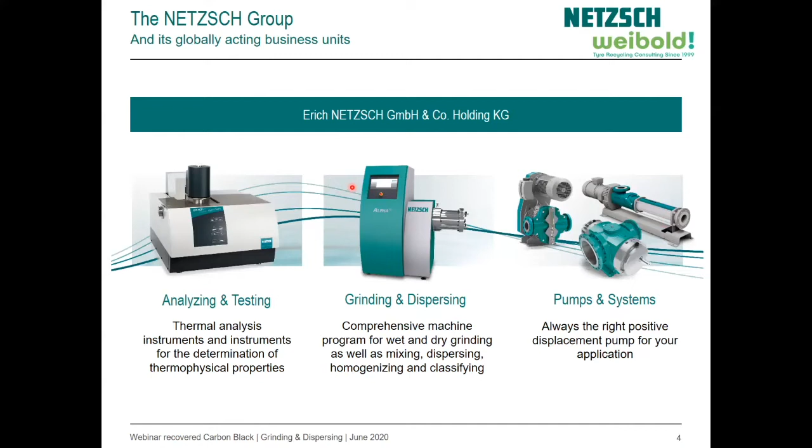And I am from a unit which is specialized in dry grinding and dry classification. So here you see the turnover in the last fiscal year: it's 500 million, and our employees is close to the 4,000 employee mark, and we are nicely growing over the last years. Like mentioned before, here are the business units, and you see grinding and dispersion is 1/3 of the turnover.

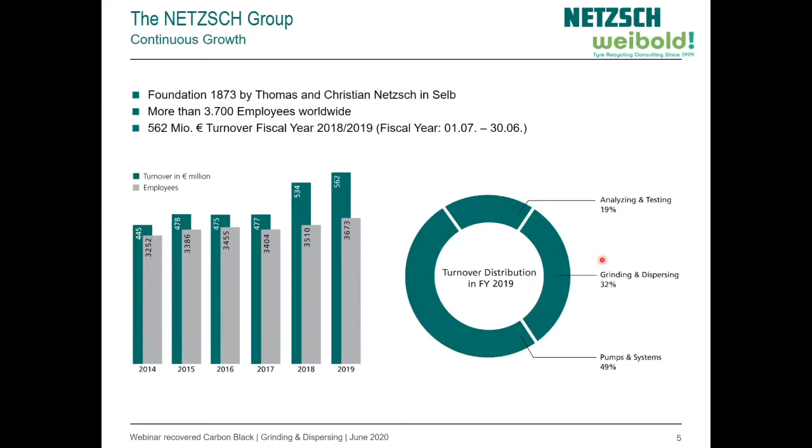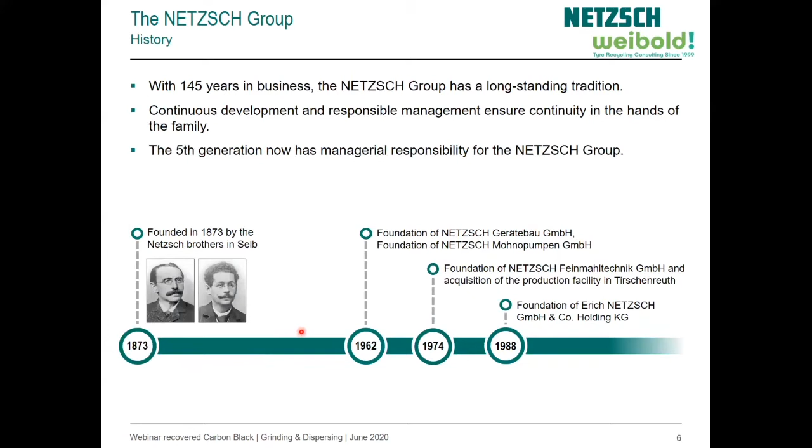We have roughly 150 years of history, and the company was founded by 2 brothers in Selb, and right now it's the 5th generation of the Netzsch family, with Paul and Moritz Netzsch on top of the holding. Together with Jens Nisser, they are leading the company and the business units on the current path.

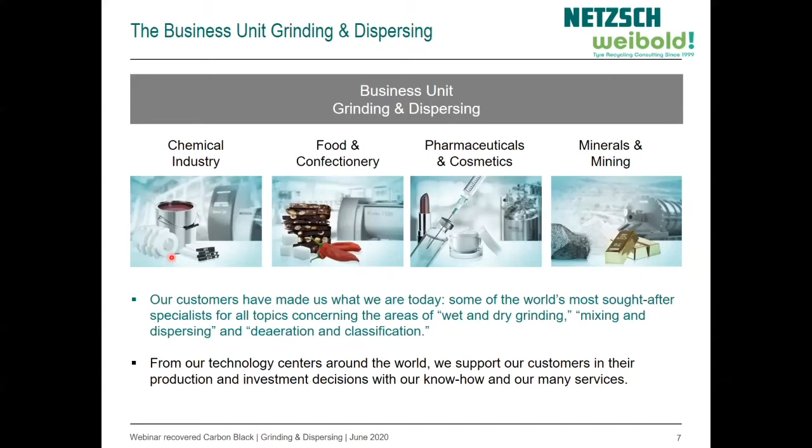The business unit grinding and dispersion is organized into 4 business units: the chemical industry, the food and confectionery, the pharmaceutical and cosmetics, and the mineral and mining unit. And for us, RCB, or recovered carbon black, is in the field of chemical industry, together with, for example, battery masses or liquids, paints and coatings, and things like that.

Our business unit has a sales volume of roughly 180 million, a bit more than 1,000 employees, and various production sites and laboratories worldwide, and also a lot of sales and service locations to always be on site if the customer needs any help or any after-sales service.

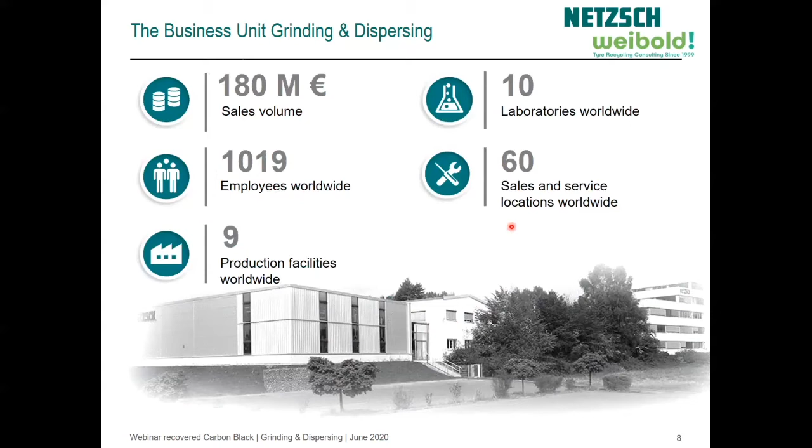So now to the core topic about efficient grinding of recovered carbon black. During the last webinars here at Weibold, I learned a lot about the pyrolysis steps, and this is, I would say, the state of the art - a very simple picture. We have the end-of-life tires going into the pyrolysis, and with the absence of oxygen and hot temperatures, we have the pyrolysis process, and you get 3 volume streams out of this pyrolysis.

The main and often focused product is the oil and gas, which is very valuable and can be sold on the market. On the other hand, you have a lot of steel wires, which can also be collected and sold on the market. And lastly, we have here the recovered carbon black.

If you have no further processing of this stream, it's more or less a waste stream, which is often sold as a secondary fuel in the cement industry, where you get maybe roughly 50 euros per ton. But here the big margin is if you have a fine grinding step - this is exactly where we come into the process, which is our challenge: to find the right technique to make a nice fine grinding step inside of this project and bring it to a certain fineness level where you have a much higher value than before. You can easily create maybe 500 euros per ton value, or even more. In some special applications, you can reach easily up to 1,000 euros per ton.

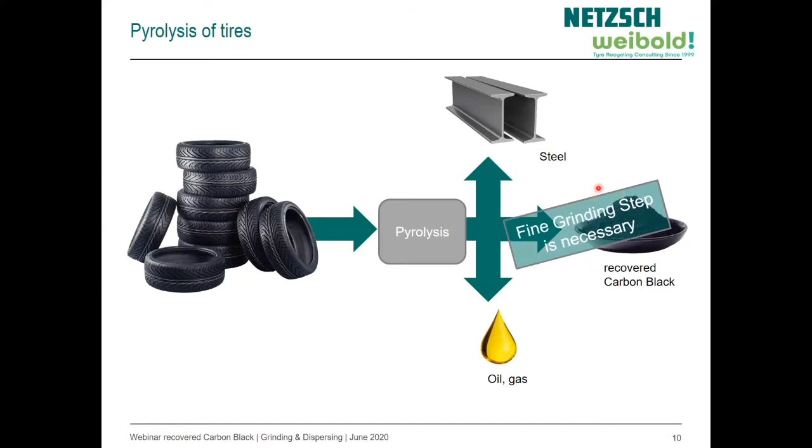So the first challenge is to choose the right machine. On this picture, you see all the machines we have in our portfolio over the working size - here's the particle size of the end product which is reachable. On the coarse end, we have a lot of cutting mills, for example for cellulose or fiber materials, which can be ground. Or we have the impact mill without any classification, just a pin mill, which works maybe down to 30 or 50 micron in a top cut for the end product.

And here on top, you see the classifier mill. It's a mechanical mill, but with a variable classifier. This can reach maybe down to 10 micron for the cut. This is the first machine which hits the targets for RCB on the market. I learned so far that we have 10, 20, and 30 microns, depending on the application, which are the main focused qualities on the market. And this machine could hit all the targets.

Even finer, we have our fluidized bed and high density bed jet mills, which can also operate much finer. The steam mill can reach maybe in the nano range, but we don't need it for the application, though it's still a good machine working in this range. Another machine here is a dry agitator bead mill - this works with a lot of friction in the grinding media, so this is maybe not the perfect machine for this application. And here we have 2 classifiers which cannot grind, just classify. So these 4 types of machines seem to be fitting for our RCB applications.

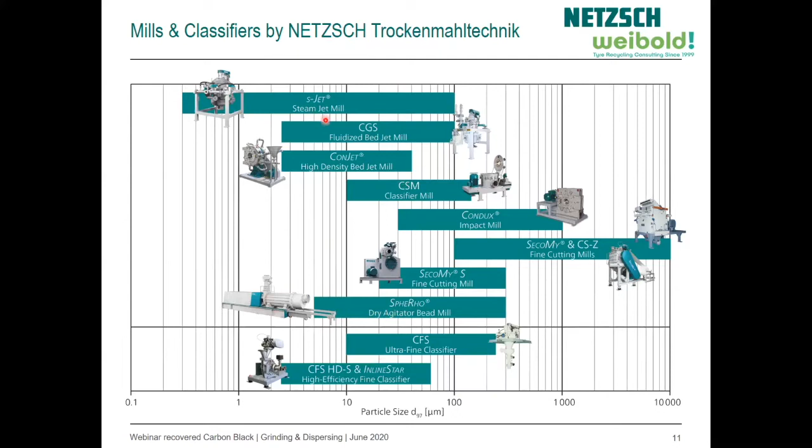For example, hard metal or alumina executions are also available to have good wear protection, but it's a mechanical mill, and you will suffer a lot of wear if you have crystalline products, for example silica. Normally for us it's a border if you have 0.5% silica in your product - we wouldn't recommend this machine, even if it's good in a good execution with hard metal or aluminum oxide to prevent the wear as good as possible. We wouldn't recommend such a mill for applications where you find a lot of abrasive products.

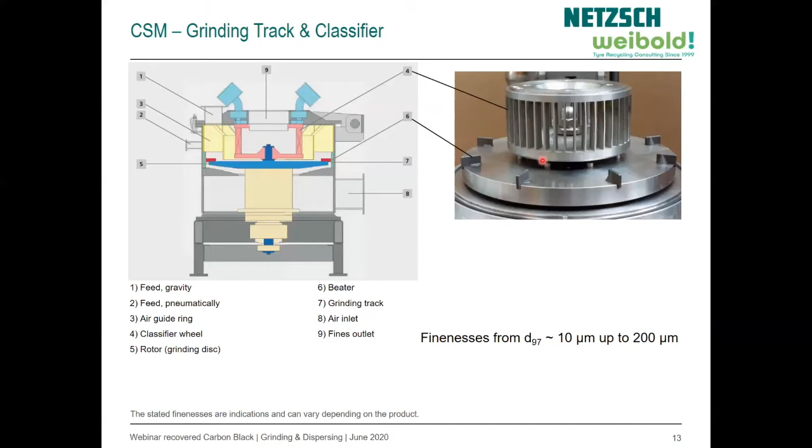On the next slide here, you see at least the advantages of such a machine. So we have a very nice oversized controlled particle collective after the grinding because we have a variable classifier on top. We have a long lifetime due to the bearings which are protected with purged air, and we have a nice possibility to access from the top.

You see here we have a double shaft system downwards here. So if you open the mill, the top of the mill, you can easily access the classifier wheel and inspect it, or even for maintenance, remove it easily. Then we have separate drives. Here this drive is for the grinding disc, and here the second drive is a bit hidden behind the machine. This will turn the classifier, so you have all variables to optimize the process easily to your application.

It's also possible to take this machine as a pressure shock resistant execution or a gas tight execution if necessary. But like I mentioned before, in terms of wear, you have to be careful if you have hard products or impurities in your mill. We wouldn't recommend such a machine, and for RCB this is the case. So often in virgin carbon black this machine is used, but for recovered carbon black we wouldn't recommend it due to the silica content and even the crystalline silica, which is still remaining in the tires from dirt from the streets, for example, will cause some wear problems inside of this machine.

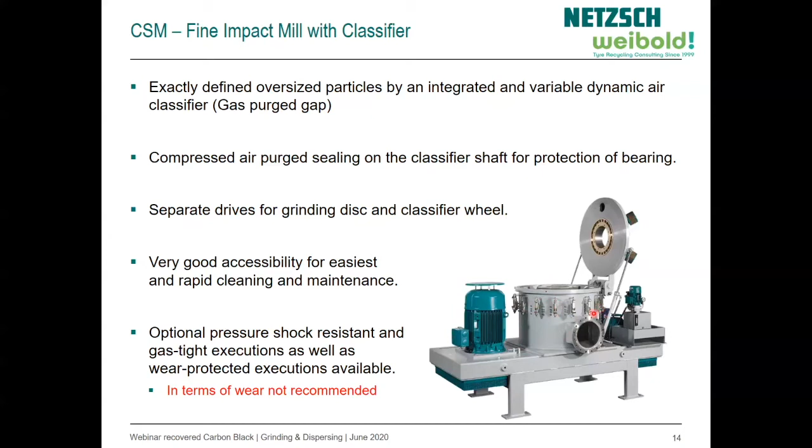The sizes can be various. All our machines are available in lab scale, like you see it here behind the stainless steel container. Here we have a blower inside, so it's a completely plant where you see the mill here. Then we have maybe a cyclone if necessary and a small filter unit. And here behind the machine you have a dosing device, so this can operate completely automatic in your lab scale

for feasibility tests, or just to produce some qualities to test the applications later on. Or you can go up to really big production scale, like you see it here, with very nice throughput ranges for big mass products.

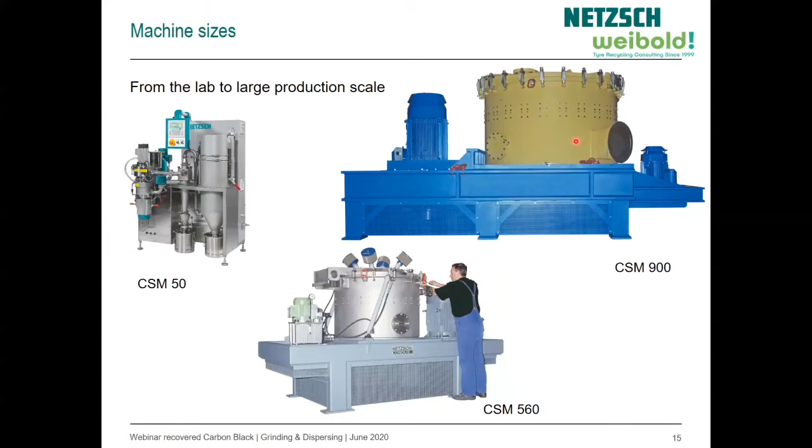So then the next step is jet milling. First of all, the definition - what is jet milling for me? Jet mill is process equipment with use of fluid under specific pressure and temperature. In our case, it's gas or steam, or the gas is normally air. This gas is expanded through jets, through nozzles, into a grinding chamber, and then the particles are accelerated by these jets and crushed by impact with each other. So it's autogenous grinding, and you have no wear due to the grinding process.

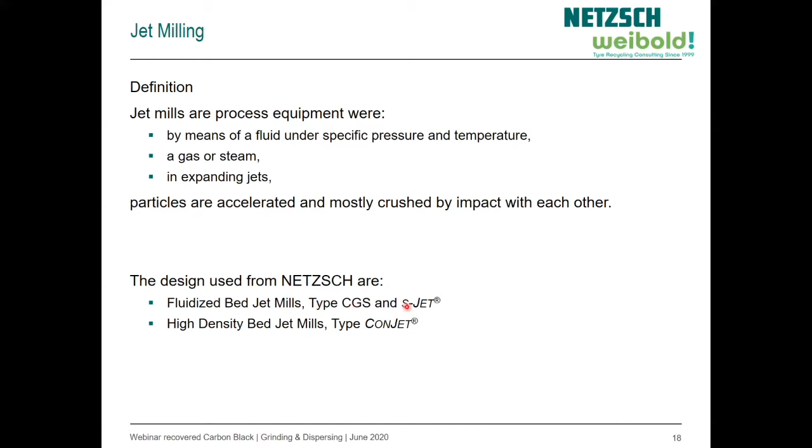We have two different types for this kind of bed mills: the fluidized bed jet mill, CGS or S-jet, or the high density bed jet mill from the type ConJet. Here you see the differences. On the right side here we have the high density bed mill ConJet, and in this blue ring we have the high pressure gas supply, which is expanding through this nozzle, and the particles which are falling through this pipe into the grinding chamber are taken into these nozzles, grinded, and are offered to the classifier wheel, which you see here in the middle, and the fine particles can leave the system and the coarse particles are rejected and fall back into the particle stream, which is in the vortex around the classifier wheel.

This execution is very nice if you have frequently changing products where you have to open the mill and clean it, because we have a very small grinding chamber and it's very quickly empty. If you want to stop, you just keep the mill running for several minutes without any feed, then it's nearly empty, and you have no losses of product.

Even if you have, for example, pharmaceuticals, which can also be a problem for health - if you open it, you have nearly no product remaining, and it's easy to clean and maintain. But this is more for specialties. For a mass product like RCB, where you try to run the machine the whole year with as few stops as possible, we would recommend the fluidized bed jet mill from the type CGS.

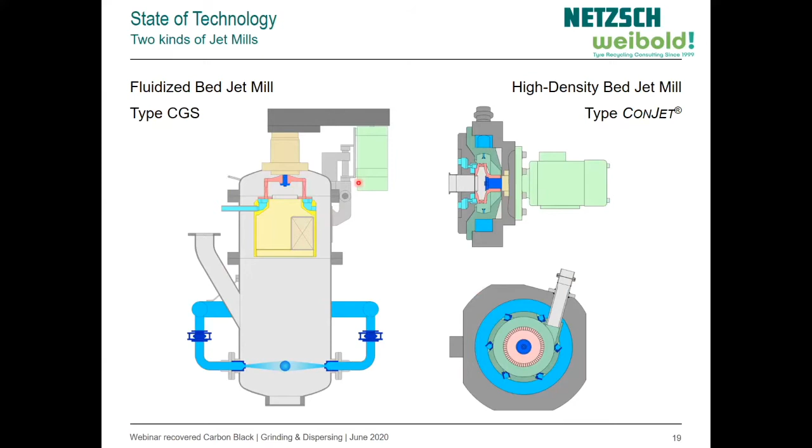Here you see the pressure supply, which expands in the grinding chamber, and the particles falling in this bed are ground, taken to the classifier, classified, and the coarse falls back while the fine leaves to the baghouse. But that will be explained in much more detail on the following slides.

First, the stress the particles will see inside the jet. The first stress is just on a single nozzle. We have the jet, and the particles enter over the surface of the nozzle and are accelerated. For example, you have a fast particle already in the stream, and another one falling into the stream, and this will be hit by the faster one from behind. There we have the first impact and the first stress on the particles.

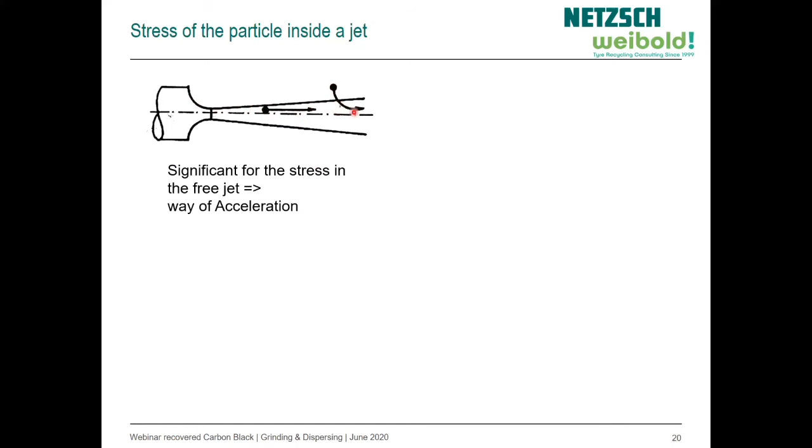On the other hand, we have the opposed system where the streams hit in the middle with a nicely adjusted distance between the nozzles, the center. The air easily goes in the other direction because there's nearly no mass in comparison to the particles, and the particles follow with their mass and acceleration, hitting each other at the focal point of the system, where the next stress and breakage occur.

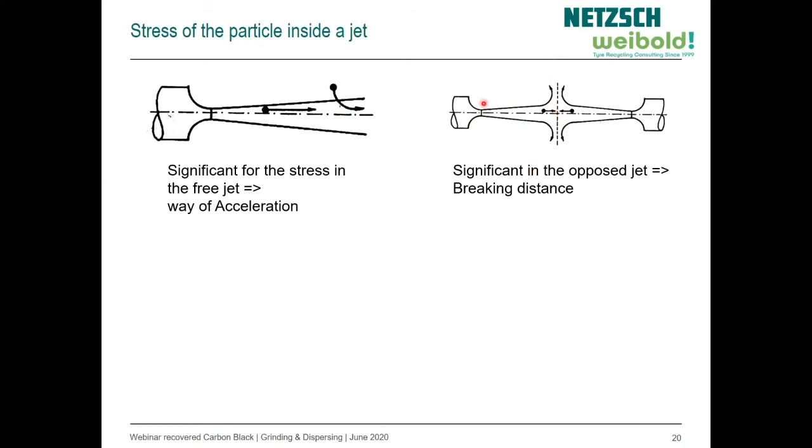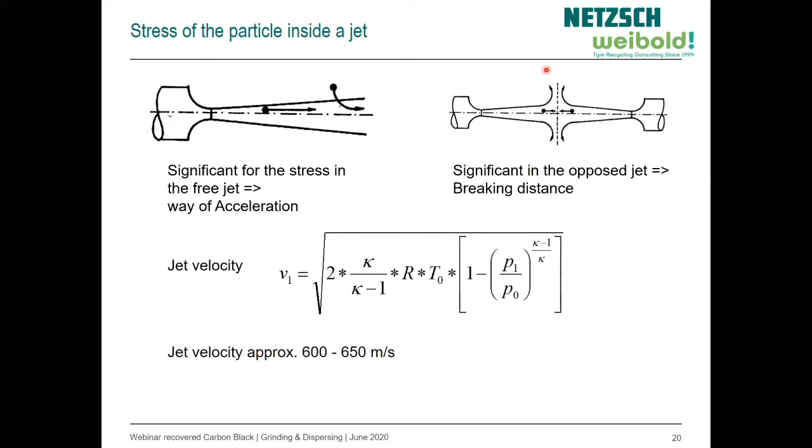The velocities here are very high, approximately 600 to 650 meters per second, easily reachable with these systems. So you see the potential of how fast the particles can shoot at each other and be ground.

Maybe 70% of the grinding takes place in the single nozzle, and only 30% occurs at the focus point where the particles hit each other. So the streams and the surfaces of the nozzles are also very, very important for our grinding.

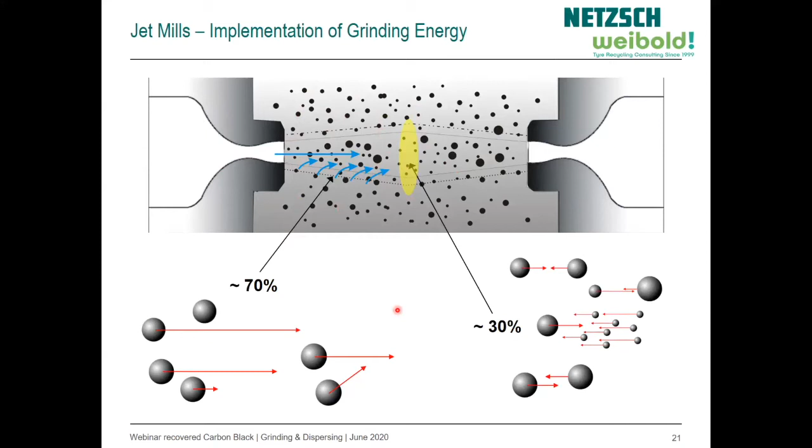But now some more words about how we operate such a mill. If I start it now, you will see the pressure and gas expand through the nozzles and leave to the classifier, and the product falls here into the fluidized bed level. When it reaches the nozzles, it will be ground and taken up to the classifier.

Maybe you see here the level of the fluidized bed is not constant yet. Of course, the fine particles will leave the system, so the level will drop, and we fill it with feed to keep a fairly constant level. The first challenge is to keep this level as constant as possible.

If we have a heavy product, we control it by the mass of the whole system. We control the mass, calculate how much fluidized bed level has to be inside, and keep it very constant with set points in our PLC. But for lightweight products, like RCB, if we have 100 grams per liter bulk density, it's not always possible to control the whole system with this mass control.

They need a different set point or value, and this is the amperage of the classifier. Here we have this belt drive classifier with the engine, and if the system is very occupied and full of product, the amperage of the classifier will be much higher than before. So we can use this as a set point.

For this, our first advantage is, of course, a single classifier design. You see we have only one classifier in the machine, and only one engine to control. This gives us a very accurate set point.

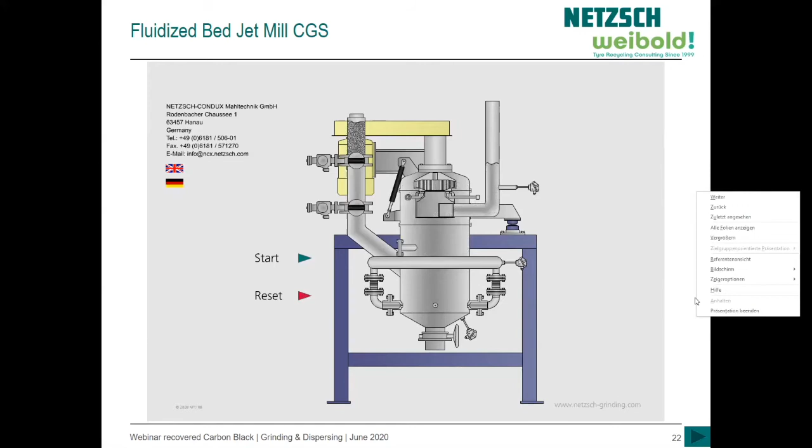And I want to continue with the new systems, S-JET and E-JET. So the question was, maybe 30 years ago, is the standard operation mode of a jet mill very accurate and the best you can reach? We always have high pressures, normally 6 to 9 bars maybe. You have quite moderate temperatures, and the discussion with customers and the industry showed that's not the best way.

You're always forced to go with efficiency. You have to reduce your carbon dioxide. You have to reduce your efficiency in terms of money. You just save money if you save energy. So we need a new system for optimized energy usage.

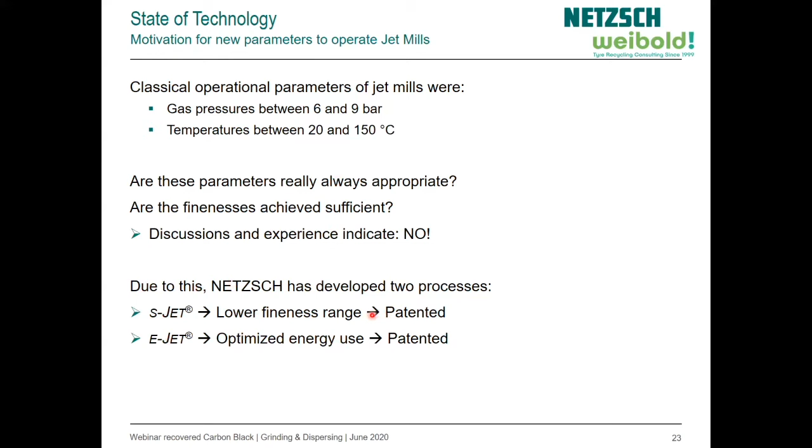And the answer from Netzsch was the E-JET system, and to be even in the lower fineness range, or even more effective, we have the S-JET system, which is for steam application. I want to explain those systems over the next minutes.

So the E-JET system - first, to understand why we optimize the compressor, you have to look at the whole system. Here we have our mill with the 4 main electric drives, I would say. We have the baghouse blower at the end, which creates under pressure in the filter to suck the product from the mill into the filter. On the other hand, we have the feeding device, which brings the product into the mill. And here we have the classifier engine, like mentioned before, which turns the classifier.

So these components are not so big in comparison to the compressor. The compressor is a very, very big energy consumer, and you have to focus on this one if you want to save energy. So normally positive displacement machines are used.

For example, here's one sketch from Atlas Copco, and the screws turn into each other, and the gas is compressed, and you have a dramatic temperature increase over such a screw. Here at the end, for example, you have 3 bar and 200 degrees Celsius. If you want to reach the conditions mentioned before, 7 or 8 bar, you need a second stage. The second stage cannot handle the high inlet temperature of maybe 200 degrees, so you have to use the intercooler to bring it down to ambient conditions, and then you can go with your high pressure again into the second stage and create the conditions required for your application.

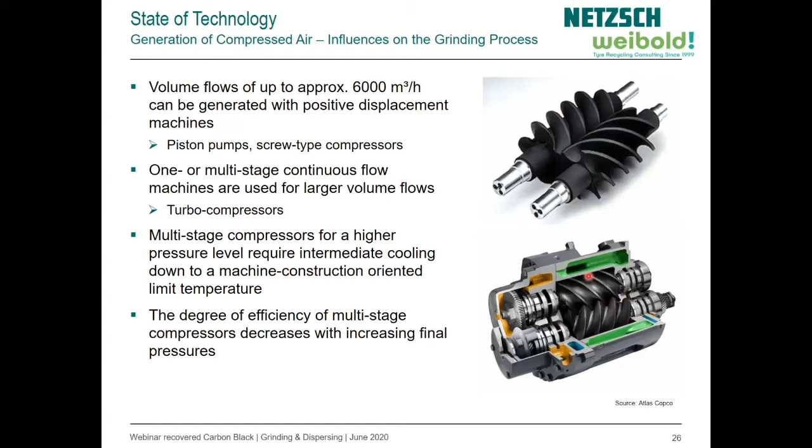And these two cooling steps, the aftercooler and the intercooler, are a massive loss of energy. This energy should be used in the process, otherwise it's a waste.

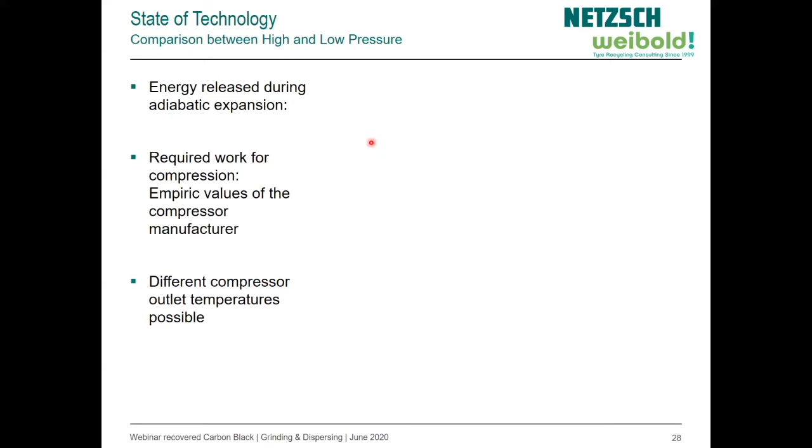This becomes clear if you see what energies we have on site during our grinding steps. So first, the energy which is available for grinding - this is the kinetic energy of the gas behind the nozzle. So you can calculate how much energy you use after the expansion.

And on the other hand, we have the work to create this kinetic energy, and this is the value from the compressor manufacturer, because this is hard to calculate. We have a lot of mechanical efficiency in this machine, so we cannot calculate it with thermodynamics laws like this. So we have to use the empiric values from the compressor manufacturer, but they have a very big database, so it's also very accurate.

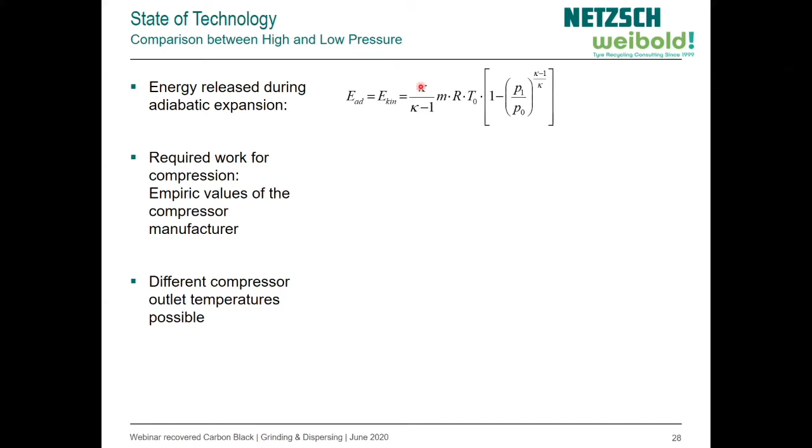And with these two values, the energy which you are putting into the process and the energy which can be used in the process, we define our efficiency. And here you see the single stage machines. If you use a high temperature, you can create maybe 70% efficiency, which is quite good.

And here in the second chart, they are two-stage machines from 2 suppliers, and the first one is using 160 degrees at the end, and the second one is using 200 degrees. So maybe if I go one slide back, they just spare the aftercooler.

So you need this intercooler because the second stage cannot handle this high temperature which is coming from the first stage, but this aftercooler can be thrown out of this project. So you just have the intercooler. So this is why we have this dramatic loss of energy.

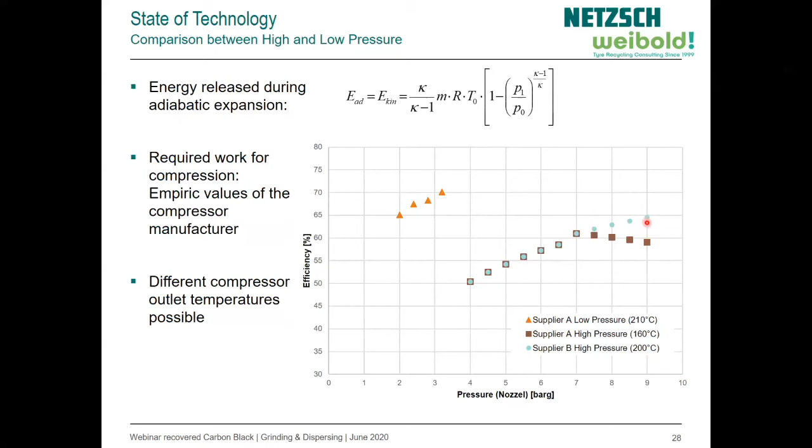But at least if you take all the energy from the second stage into the process, you have a higher efficiency. And you see supplier A is not able to take all the energy from the first step into the second, or not as much energy into the next step as supplier B. Supplier B can end up here with 200 degrees instead of 160, and you see directly the change of the efficiency.

So we try to take a single stage machine, go as high as possible with the pressure, and take as much temperature as possible into the process to have a much higher process volume than you would have at lower temperature.

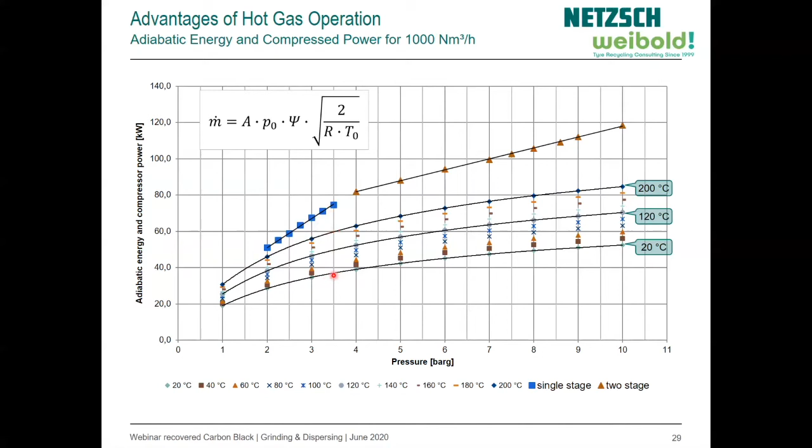So I want to summarize the e-Jet concept. We have one classifier wheel in our machines. This is a factor for constant product quality and reproducible fine cuts. It's easy to maintain, and it's steady and low wear. We have high efficiency due to the flow optimized machine design, and we have patented nozzle distances for hot gas operation to have an efficient setup. And we have a temperature stable bearing for high availability.

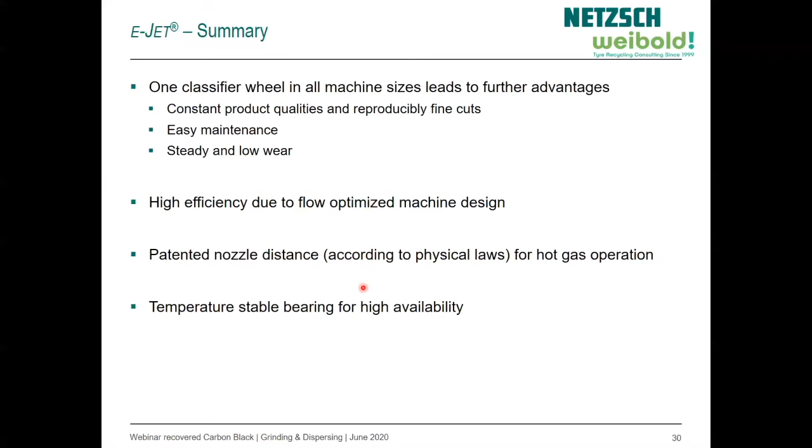We just create very nice heat inside. Then we have maybe thermal oil to take the heat away. Then we create steam, and the steam goes over a turbine, and the turbine turns a generator, and then we have electricity which can be transformed into the net. Then, simply put, on site of your plant, you can plug in your compressor and create your e-Jet system.

But already here, after the transformation of energy, we have maybe 36% efficiency. So this has a loss of roughly 60 to 70%, and this is a malus. This is a carbon dioxide backpack which we already have when we plug in our machine.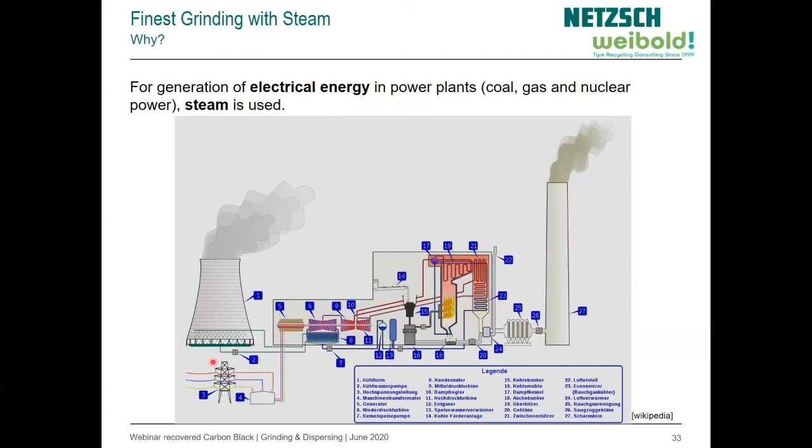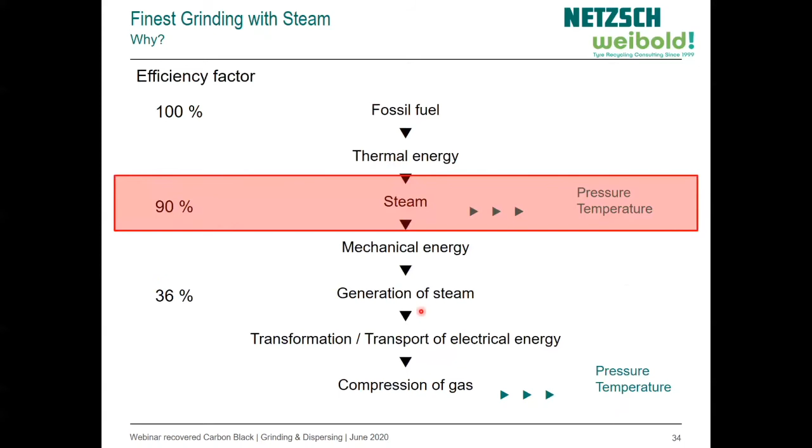So why shouldn't we stop here at this stage? Where we have 90%, where we burn our fossil fuel, have thermal energy, we are creating steam, so we have a gas with high pressure and high temperature. This is exactly what we normally reach with our s-Jet system. So we can stop here with an efficiency of 90%, which is much higher than everything we can reach down here, because we have the mechanical steps of our power plant in between.

Our standard conditions which we are using for the s-Jet system are normally 40 bar, but if you go higher, you are even more effective. For example, in the US, we have plants which are operating with 100 bar pressure. It's also possible. And we expand the gas over our nozzles, and then with the internal pressure of the mill, we end up at 1.1 bar pressure and maybe 300 degrees.

So you see we are again much above the phase boundary. We are still in the saturated area -- in the overheated, not in the saturated, in the overheated steam area. So our particles never see any moisture. They are kept very dry all the time.

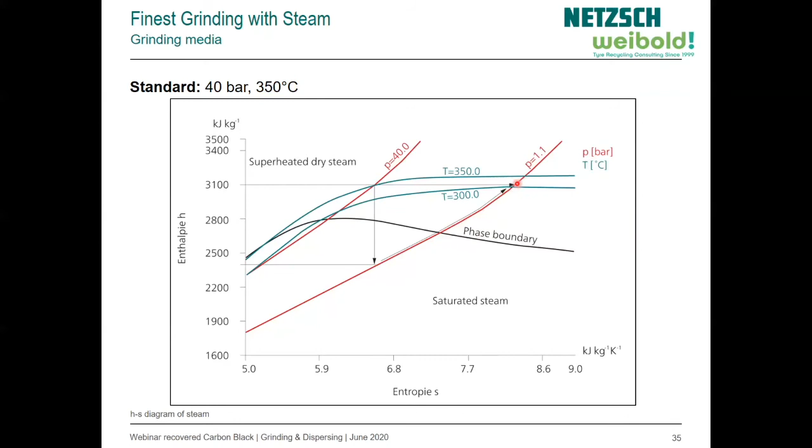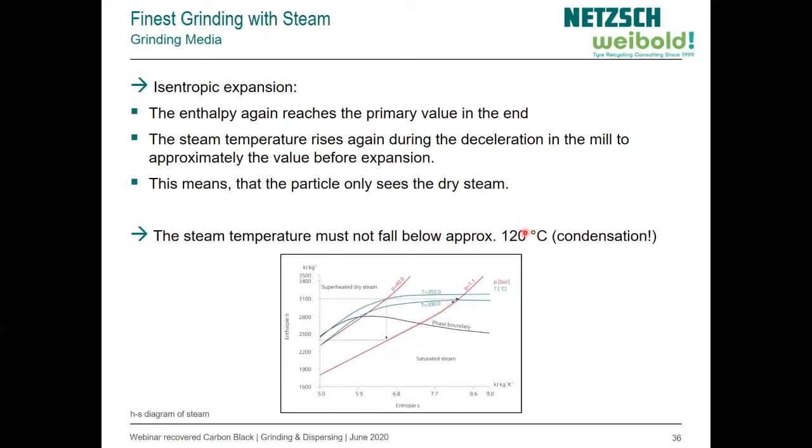So this is an isentropic expansion, and the enthalpy, as you see here, is nearly the same. Only the entropy, which is used for the grinding, is changed. And even at the back of our filter, we have 120 degrees minimum, normally a bit more, to be sure that we never have any condensation inside our process.

Here's an image of steam and product temperature improvement. So we have here our whole steps over the mill, and here we have the temperature in red from the product and in blue from the steam. At the beginning, where the steam goes to the piping coming from the boiler, we have 350 degrees for the steam and maybe ambient temperature for the product.

And up at the nozzles, we have some losses over the piping, and the temperature of the product is still the same because it's in contact with the steam. And then we're expanding the steam through the nozzles. There we lose, due to the expansion, a lot of temperature. And here we have the first point where they have contact with the product.

So we have heat transfer at the later points, and we are mixing the product with the steam, and it's grinding and it's dispersed, and the temperature of the product is rising while the temperature of the steam is coming down. And here at the filter, both components, product and steam, are separated, and the steam goes, as mentioned before, at 120-130 degrees over the blower into the environment, while our product can cool down back to ambient conditions.

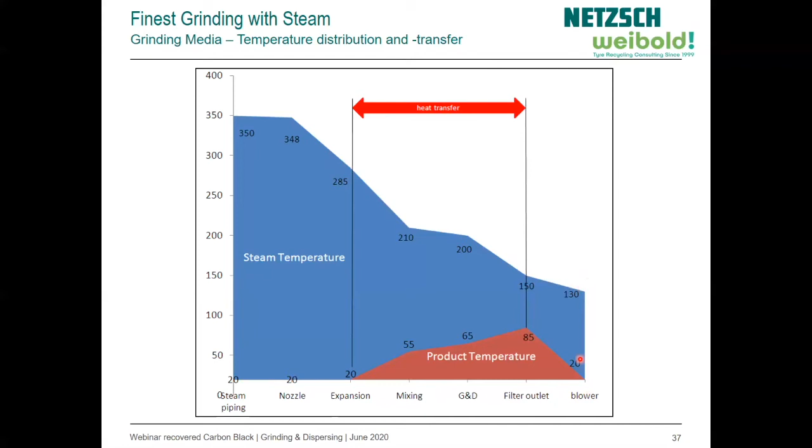So a very important point is the steam supply. We take the steam, if necessary or if available, from the steam network. That would be the perfect conditions if you're maybe on a big industrial area, or if you are operator of a petrochemical industry plant, then you often have a steam network on site. This would be the perfect solution.

Another very good solution would be if you have an existing saturated steam network, then you can install a local superheater to get the steam into the conditions that you really need. Or the last possibility is also possible: you have a separate boiler which is directly linked to the plant. This is, for example, what we are doing in our test lab.

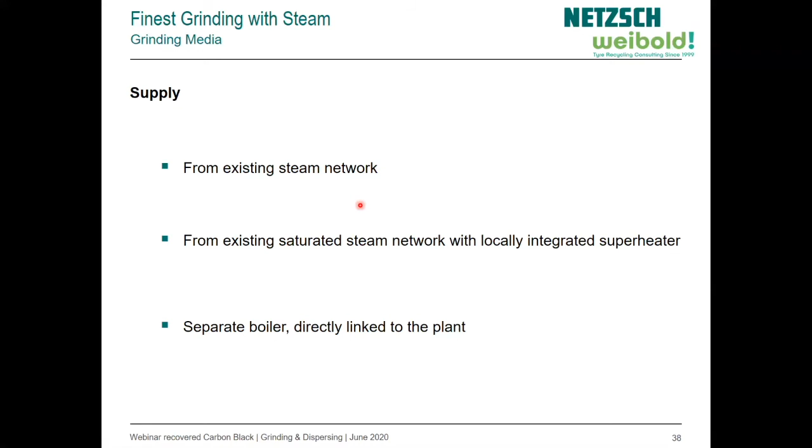They need some components I will explain later on. And of course, you need a fuel. Electrical is normally only used for test lab plants, because then you don't have the efficiency bonus like I mentioned before. But oil and gas in general is taken. And that's also very interesting. We can maybe discuss it later on.

Even in the RCB process, in the pyrolysis, you have a lot of gas which is maybe not possible for sale. And I know that some of the plant operators burn it in a gas engine to create electricity for their steps, or even to sell the electricity. This is also a nice option. Maybe you can switch this and use the gas directly as a fuel to your milling step.

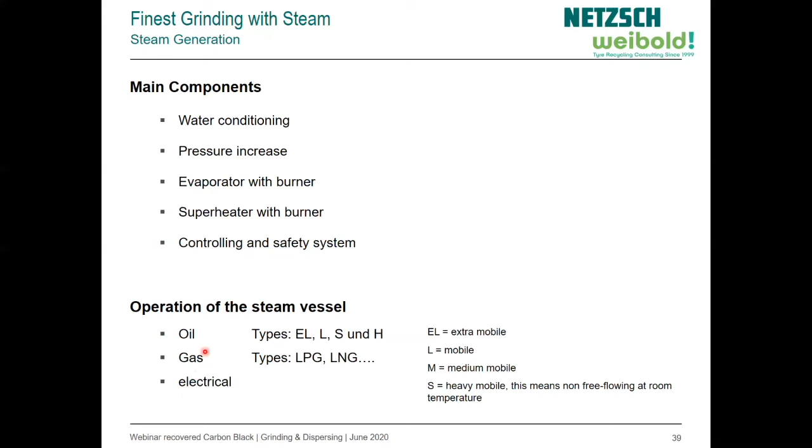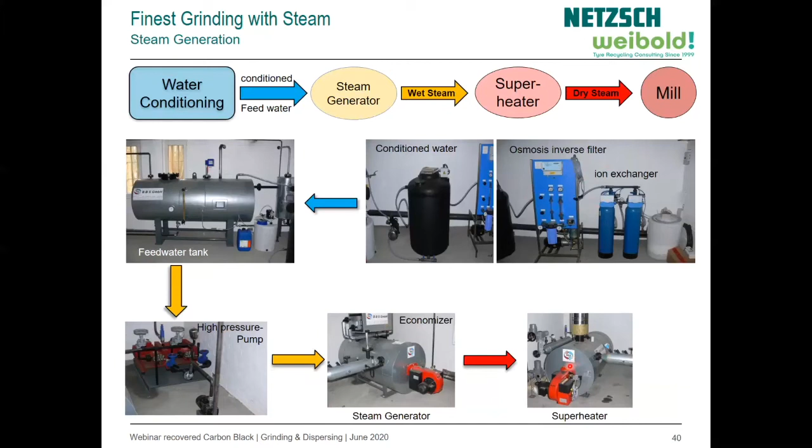But now the steps in our test lab: we have a very nice water condition unit, feed water tank, high pressure pump, then the steam generator with the economizer for the steam coming back from the superheater, and the superheater which delivers these conditions to the mill.

And this was a very wide installation because it was our first one, and we had plenty of space, so we made it easy to maintain and easy to change something.

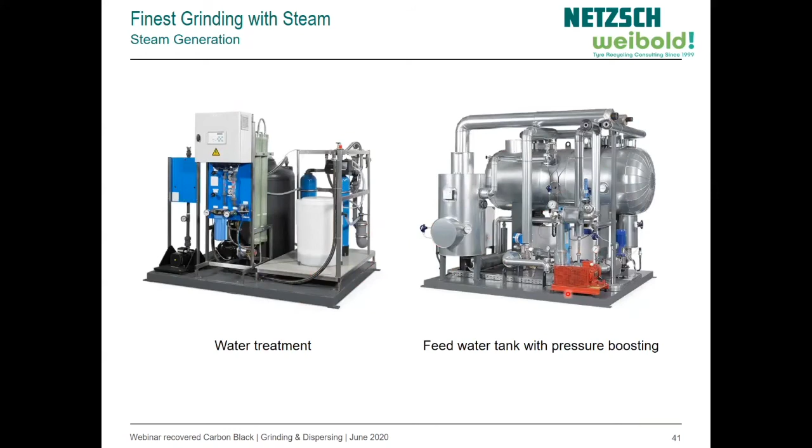Right now, for an industrial plant, we have it much more compact, like this installation on a skid. You can use it in a container, and it's easy to operate and easy to commission on site of the plant. So we have a water treatment and the feed water tank with all the pressure boosting, like the high pressure pump here, and then the steam boiler and superheater as a second unit. And yeah, it's very nicely compact already.

So the summary of the s-Jet system is nearly the same as the EJet, because everything like the single classifier wheel and the autogenous grinding stays the same. Additionally, we have much higher pressures and much higher velocities, so we have much more energy in the system.

So we have double the jet velocity. We can reach much higher values than 1,000 meters per second. And this leads to the fact that the capacity of a mill with the same size can be much higher than the capacity of a normal jet mill operated by air.

Then the efficiency, on basis of primary energy, is much lower in energy consumption, so the efficiency is higher, and this leads to a much better CO2 emission over your process. And existing steam networks can be used, or better, should be used, because if you already have steam on site, this is a perfect solution for your application.

Now a short comparison of steam and air. Maybe just the technique at the beginning: here we have the mechanical compressor and the thermal steam generator.

And I think the most important point is that the generated heat in both systems can be used. Here we should use it for the EJET system, and here it can be completely used, because the burner or all the waste heat is also useful to increase the temperature of our fluid from the inlet side.

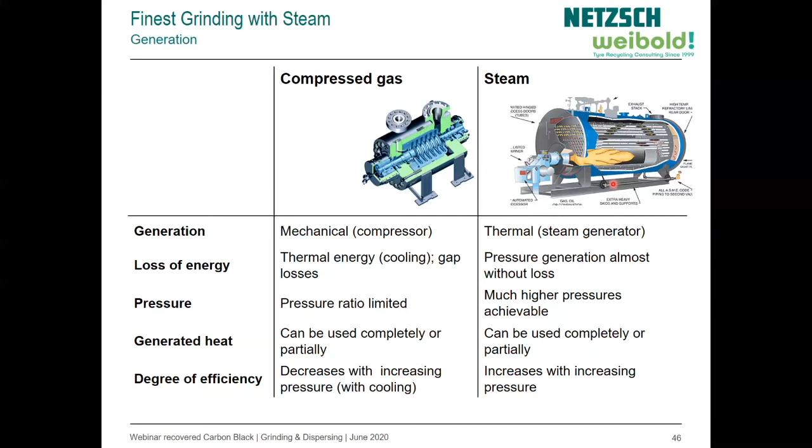Okay, but this is more of an academic point of view and always about energy, but that's normally not the important point for industrial applications. We always go after the money, and this efficiency can also be directly transferred into money.

But here first you see the efficiency for primary energy, and even if your electric drives on the plant for the EJET system are nearly perfect, you at least have the same efficiencies in the power plant as the electricity you get. And here the 90% can be directly influenced by your process, by your steam generator.

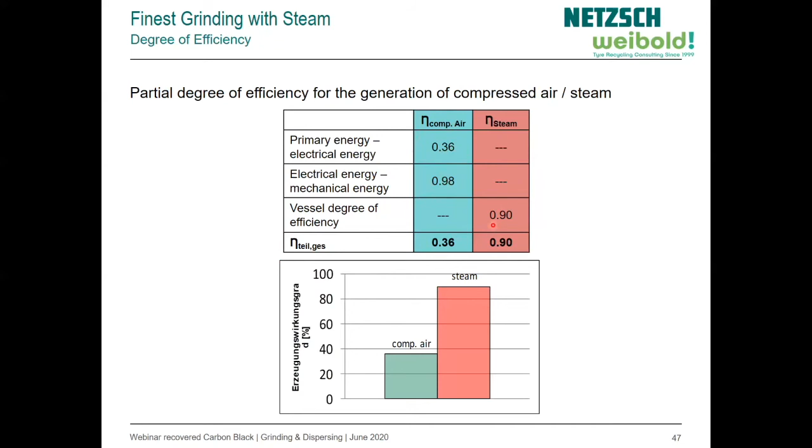But now the promised chart for the cost comparison. I take a fictive number for a 3-ton RCB plant, which can be operated with one air mill. We have a feed size of 2 millimeters, for example, and the product size should be everything below 10 micron. I took the same identical specific energy for both systems, for the EJET system and for the s-Jet system, and I discussed with a German customer what the prices for the supplies are for energy, for electric energy.

He told me that's 0.1 euros, so 10 cents per kilowatt hour. The operation would be E-jet system with 3.2 bar and 220 degrees Celsius. So the operation cost just for the grinding step, without any before and after steps, just for the grinding, would be 22 euros per ton of RCB.

And for the s-Jet system, the same customer told me that you have an internal cost factor of 20 euros per ton steam. And then you can operate at our standard conditions close to 40 bar gauge and 320 degrees Celsius, and the operation cost would be 15 euros per ton.

One very interesting point is, like mentioned before, this cost should be directly checked by yourself. So if the steam is maybe much cheaper because we have some liquid oil or even some gases which can be burned on site, maybe your cost will be dramatically lower.

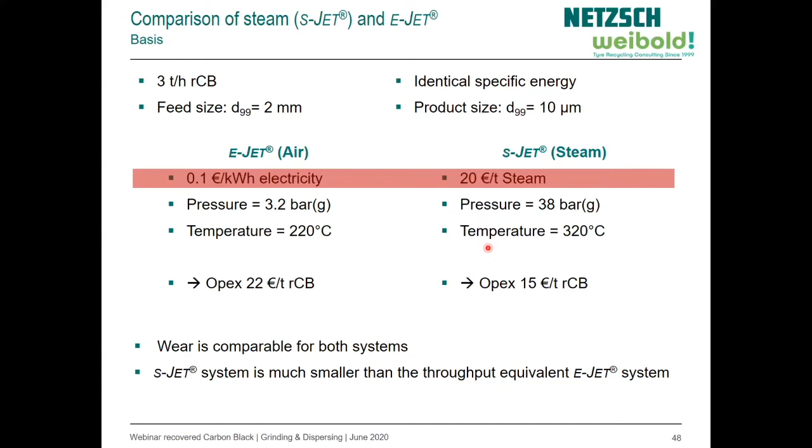So now I come to some examples and references, two to be correct. The first one, I would say, is a medium sized machine. It's a CGS71 with 2,000 cubic meters gas volume.

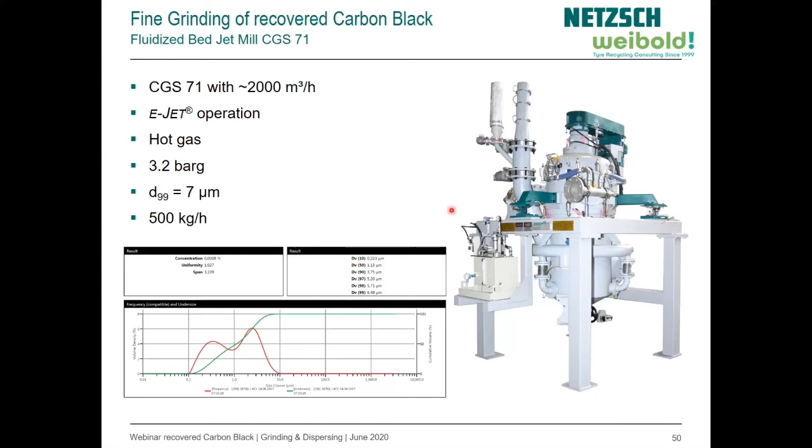This is an E-jet operation for hot gas at 3.2 bar gauge. The target of the customer is 7 micron, and the throughput which was guaranteed, which in reality is a bit higher, was 500 kg per hour. You see here our measurement, done with a Malvern Master Sizer 3000 in dry operation mode, and you see the D99 with 6.5 micron is perfectly hitting the target. So this is a nice machine in operation.

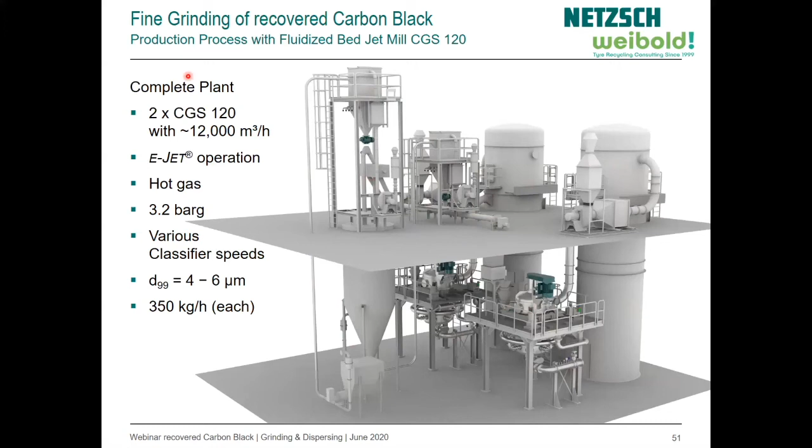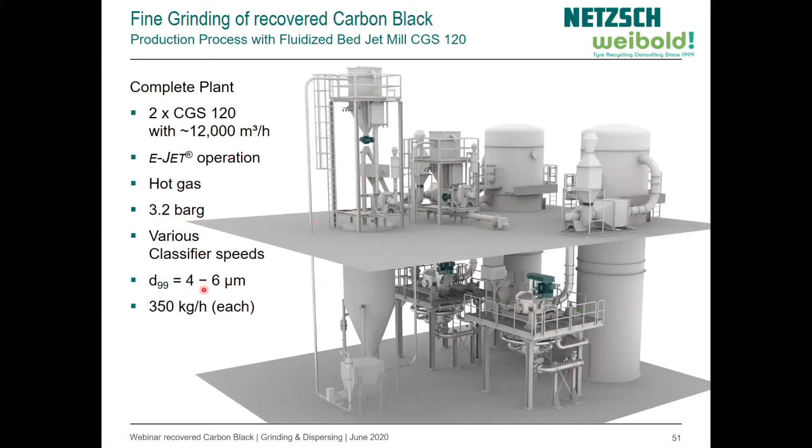These machines are bigger, with 12,000 cubic meters per hour. It's also operated in E-jet operation with hot gas at 3.2 bar gauge. Various classifier speeds are requested, and for the finest point, for the 4 micron, maybe you see it here on the next slide.

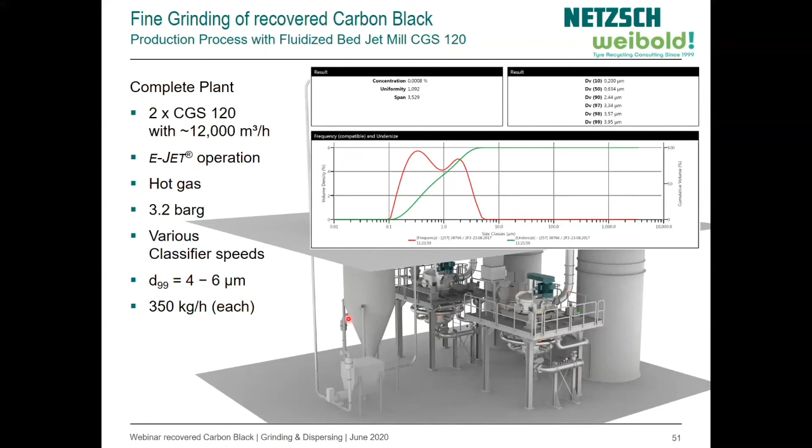Okay, another important point we learned in our test lab, also very interesting to mention, is that the quality influences specific grinding energy dramatically. We have here two different qualities of RCB, which I call RCB A and RCB B. In terms of quality, for example, the pyrolysis process is different: is it a batch or a continuous process, is it 2-step or 1-step, is it with microwave, with electricity, with gas, or whatever. So everything beforehand influences strongly the quality and also the composition.

This was, I would say, good grindability for the product. So if you reach, for example, 6 micron in the D97, you need roughly 300 kilowatt hours per ton of energy for RCB A, and for the same quality, the same fineness, RCB B needs roughly 1,000 kilowatt hours per ton.

So you have the capacity factor of 3 or even more between these 2 qualities, just due to the differences in your process before. So it's very interesting for us to know as much as possible about your RCB, and it's also interesting for you if you want to make trials to determine how big your grinding step should be to get the real quality you later have in the process. Otherwise, there could be a big difference between the checked and the calculated values.

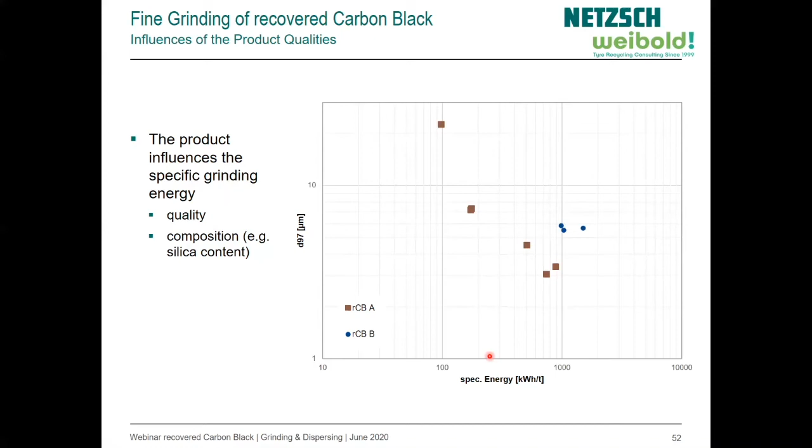So the last slide, just a short summary for all the points I mentioned before. The fineness of recovered carbon black is important for later applications. In my point of view, you should definitely go with a fluidized bed jet mill. It's a proven technology, very wear resistant, and even if it has a higher investment than comparable mechanical mills, it will be a very nice machine later on, very stable and with low maintenance cost.

Then the 2 systems I introduced to you: the E-jet system, a kind of standard machine with a compressor. We already have several systems on the market running, producing, as mentioned, very good quality RCB with electricity. On the other hand, we have the s-Jet system. This isn't often used right now on the RCB market, but it seems to be very promising. And there we should also do some tests or proofs if you have steam available on your plant.

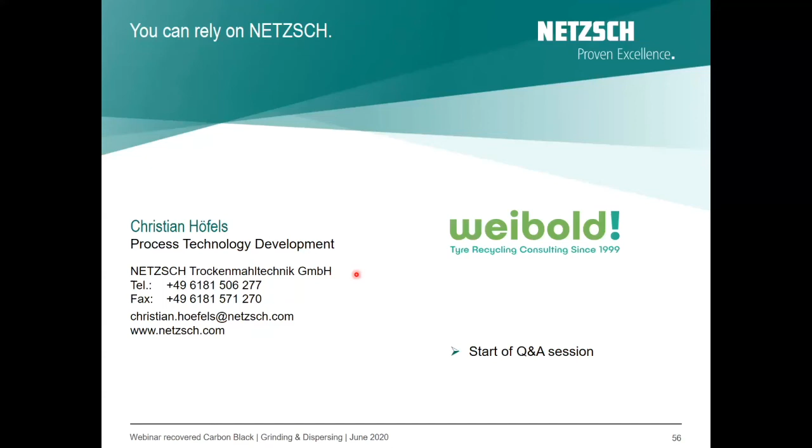Yeah, of course there are some costs because we do the test for you, and you are invited to join the tests. Our test lab machine is a CGS 50, so it's roughly in this range, and normally I would say we need half a day for one setup. So if you just specify your target, for example D97 or D99 of 10 micron, then we can produce something in this range, around 300 kg per hour.

And if you want a very stable run, you need 1 ton of product for such a single point, and then we can make the accurate scale up and say exactly which size for which throughput you would need with your specific RCB.

Thank you, Christian. Next question: what are the pros and cons of using air versus steam as gas?

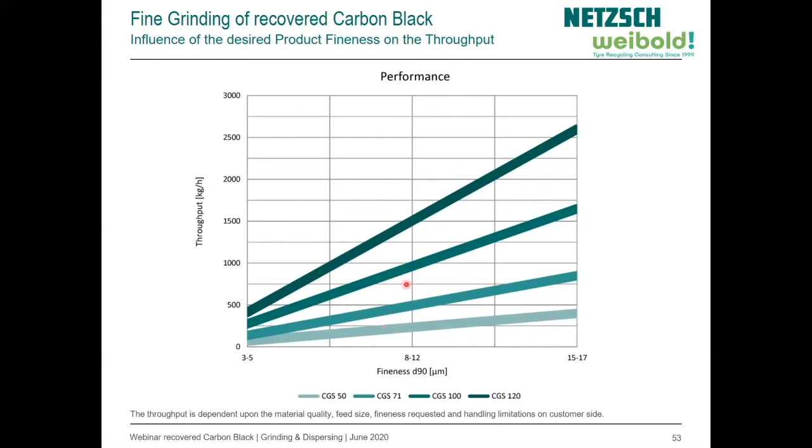Yeah, maybe I can go back a slide to the summary of the s-Jet system, because I think all the advantages are the same. We have this one classifier wheel, low wear, and easy maintenance. I don't want to go through all of them again, but the steam can create more energy into the system, and you have a better efficiency based on the primary energy.

But of course this is a different process. You need steam on site. If you have a steam network, I would highly recommend using such a system. But if you don't have steam on site, it's a much higher system requirement to build the steam boiler and so on. So you have to carefully look at which is the more optimized system. I think for each specific case you have to check carefully which one is the best solution. So both are possible. Thank you, Christian.

Next question: are smaller than CGS 50 lab size machines available? We are interested in capacity 1 to 10 kilograms per hour.

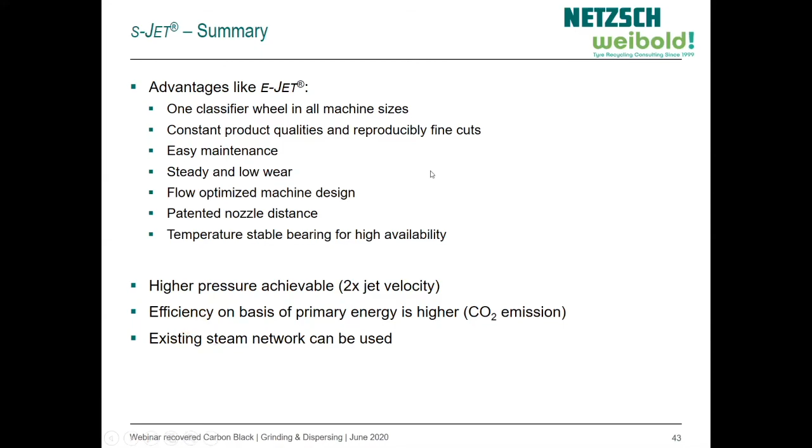Yes, I can also, maybe I would end my presentation shortly, and you get the presentations later, and I put some information additionally in this field, so I can show it for a second here.

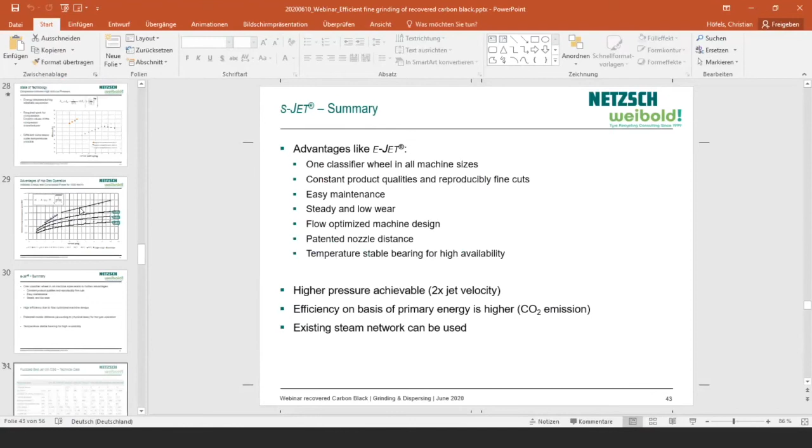Thank you, Christian. Next question: how does the value of the carbon black differ based on the different size of particles?

I think this is connected to the application where the RCB is later used. If you go with 10 or 20 micron D97, then it's for the plastic industry, for paints and coatings, and if you have a high valuable product there, you can create maybe higher values. If you create a 30 micron product, for example for technical rubber—if you make conveyor belts and just use a small amount of RCB as a blend—then maybe it's not so worth the money.

But it's also, I think, very strongly connected to the feedstock. If you want to create a fine product, you need a very good feedstock and a very good pyrolysis before. So everything is very closely connected there, and you have to carefully look behind the steps.

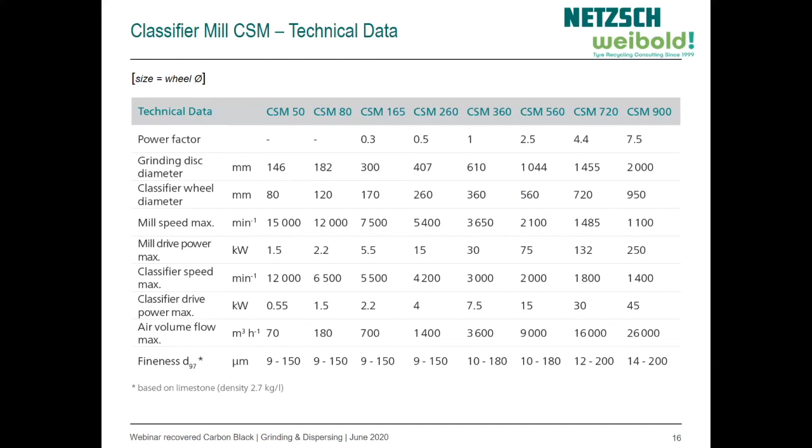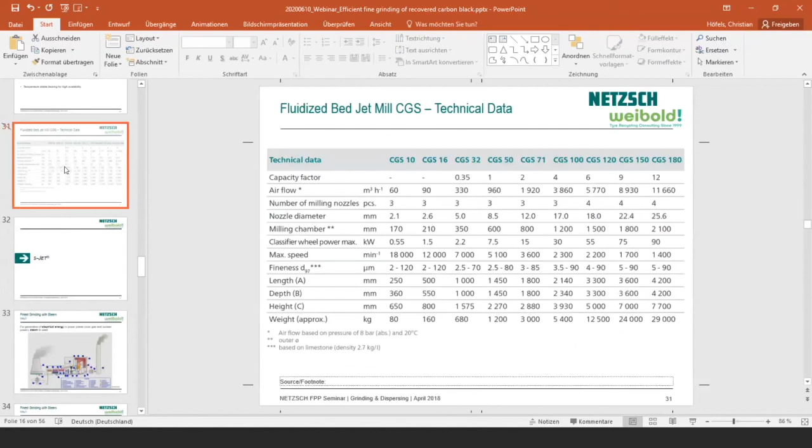Maybe I'll put up the next slide, which you'll get later on in the PDF. So here you see all our CGS types, and here the airflow. The throughput range is very closely connected to the airflow. Our CGS50 has a capacity factor of 1 - this is what we use in our test lab, and there we have 300, maybe 350 kg, for example, for a D97 of 10 micron, and you can calculate back or up over the airstreams to find what applies here.

So the CGS16 is 10 times smaller, which can be easily calculated - maybe 30 kg per hour, and this is maybe even half that, because it's going very small. So 5 kg per hour, something like that, I would expect for this fine product, if you have nice and pure RCB.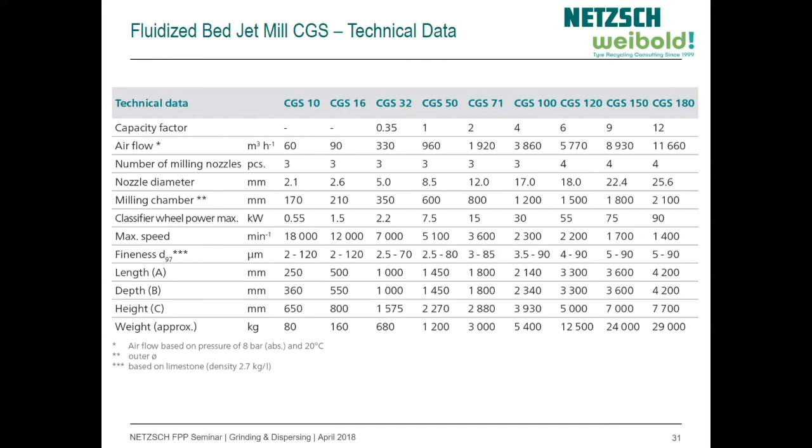Yes, it depends also on the process. Maybe with a very simple flowchart, you could have some dust emission here, or if you change a big bag, you could have some dust emission there. Normally, for example in the test lab because we change products very often, we have small piping here and there just to suck some aerosol directly away.

But normally, if you're running continuously, you have the double flaps here, which are very tightly closed, and the double flap here, which is also perfectly closed. So normally you have no problems, just maybe when changing your containment, but that depends on the process you have internally in your plant.

Thank you, Christian. Next question. Do you have any operating units in Canada or the USA?

Of course we have, but I think not for the RCB market. I cannot be so detailed on customers, but as I know, in the US and the RCB market, I don't think we have any projects there. But of course, we have a lot of jet mills running in these countries.

Thank you, Christian. Next question. Did you study the impact of jet milling on the chemical surface state of recovered carbon black? Is any oxidation suspected to occur during the operation?